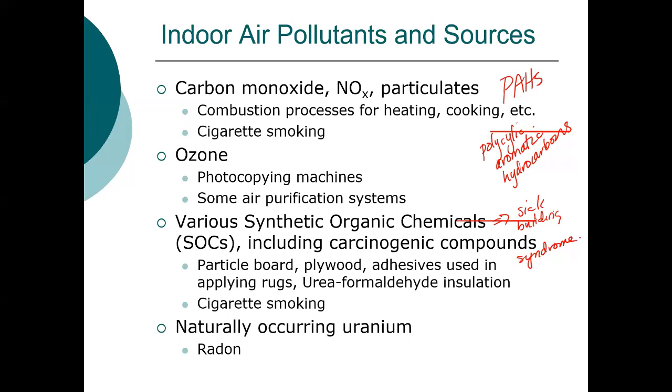When we model indoor air quality, we need to look at air movement into and out of the building. So we talk about infiltration. So infiltration is the natural air exchange that occurs between a building and the outside when all the doors and windows are closed. Cold day, you go for a walk, walking to class, you notice a home with a lot of icicles formed on the eaves.

Why are there icicles on the eaves? Notice other homes don't have icicles on the eaves. What causes those icicles on the eaves? Exactly, because the heat escapes easier, melts the snow, refreezes, and forms icicles. Tighter home, the heat isn't escaping, so you don't get the melting and then the icicle formation.

Air can move in and out of the house, through the eaves, through the sills, around your windows, around your doors. Really depends on how well those are sealed. The amount of infiltration is dependent on the difference in the pressure on the inside and the outside of a home, and also on the difference in the temperature.

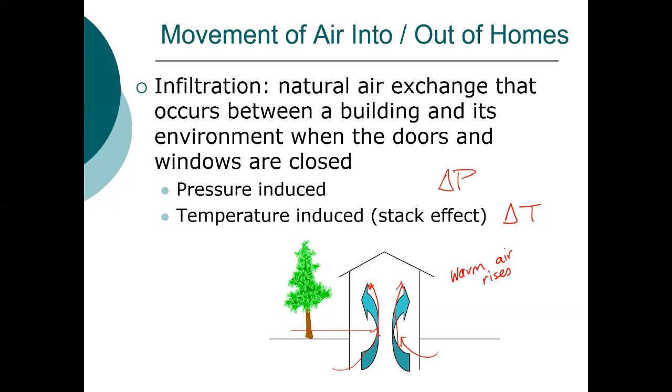We also talk about natural ventilation. Natural ventilation is that air exchange that occurs when the windows and the doors are open. You open the windows, you increase air circulation, and you're getting more air from the outside inside. Thanksgiving, a fair number of people did this where they wanted to gather, or for Christmas, they wanted to gather. They're worried about COVID.

So I know a number of people that actually had their dinners with their family in the garage, opened the windows, tried to open another window if they could in order to get cross ventilation. In order to do what? Why would they want to do this? Why would they choose to have dinner in the garage, open the garage door at least somewhat, open another door in order to get cross ventilation? What were they trying to do? To get fresh air. Right, to get fresh air, to lower, if anybody was sick with COVID, to reduce the concentration of virus particles in the air.

Forced ventilation is that ventilation that's due to mechanical air handling systems, so using fans and blowers. We can increase ventilation, so we increase ventilation. That decreases the concentration of the pollutants, but it increases our heating and cooling costs.

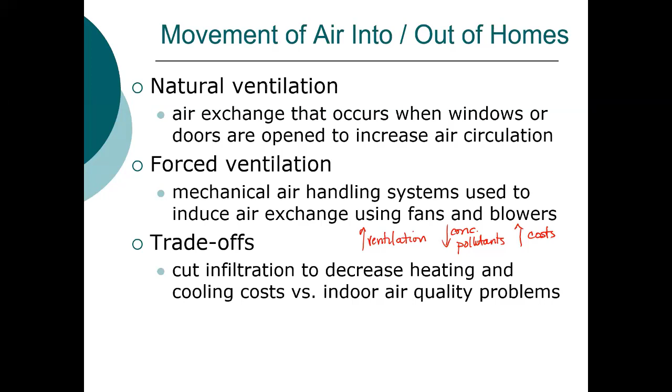Back in the mid-1970s, there was a major energy crisis. The cost of gasoline increased by about fourfold. Lines at gas stations were hours long. And as a result, a lot of homes that were built after that were built to be extremely tight, meaning that there wasn't much air exchange. Reduced heating and cooling costs, but the opposite was what? What happened in terms of concentrations of pollutants? So we make what we call a very tight home. We don't have much air exchange. It increases the concentration of the pollutants. So it's always a trade-off.

So as mentioned, infiltration rates depend on the wind speed, direction, the temperature differential, the pressure differential, and also where the leaks are located. Typically, air exchange rates in a home are about 0.5, and this unit here is air exchanges per hour. So a typical home is about 0.5 to 1 air exchanges per hour. So if we model the home as a box, it has a certain volume. If we have 1 air exchange per hour, then this volume of air is exchanged every hour. Very tight buildings, less than 0.5. A very leaky building can be as high as 10.

And also think of the same in terms of ventilation. So for instance, in a hospital setting, especially where you're dealing with infectious diseases like COVID, the recommendation is that the air exchange rates be in excess of 10 air exchanges per hour. You're trying to exchange that air to minimize the concentration of the airborne virus, in this case COVID, in order to minimize the potential for transmission.

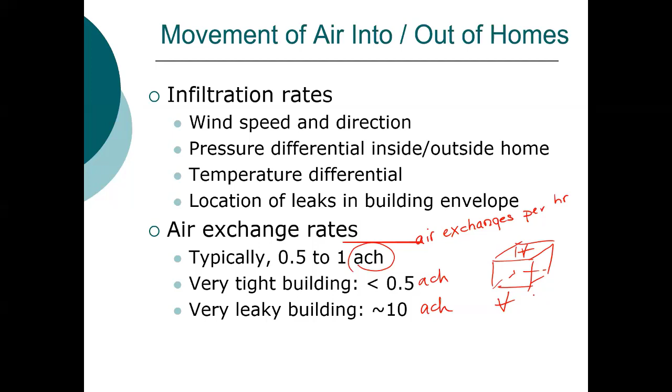Now, we will model indoor air quality using a very simple box model. So we will assume that this box is well mixed, that it is a CSTR, a continuously stirred tank reactor. Air will enter. We'll use C sub A to describe the ambient concentration from the outside entering the building. We have sources within the building. We'll look at decay, the decay rate constant, K. We may have sinks in the building.

We have decay rate. What are some potential sources of contamination or sources of pollutants inside this indoor environment? Named a few of them before, but let's think about what are some of the sources. Your own home, what are the sources of various different pollutants? Cooking. Okay. So especially if you have a gas oven. Breathing, CO2. Furnace, carbon monoxide, CO2, NOx. Anything else?

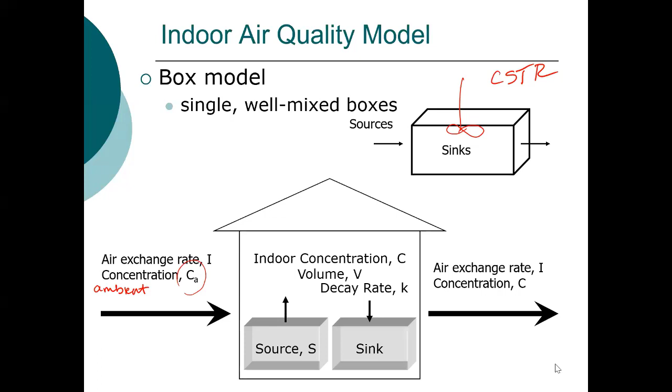It can be removed by ventilation systems, or by vacuuming. It settles to the floor, and then you sweep or vacuum it up. So it actually has sedimentation occurring. We can model that sedimentation typically as a first order rate expression, and we could vacuum it up. So those are some potential sinks for the pollutant. And then that pollutant can leave through the ventilation system. It can leave through the leaks in the house.

So we will describe the fate of these pollutants with a simple mass balance. We can describe the rate at which the concentration is increasing or decreasing within this space mathematically as the change in mass with respect to time. And that is equal to the mass rate of the pollutant entering. It can enter from the outside, so we have some flow in times the concentration coming into that space, plus whatever source terms are in the house,

minus the mass rate leaving that space, minus the mass rate of decay. And we will typically describe this with a first order reaction, K, so first order rate expression, C out times the volume in the system. Now, our mass is equal to the concentration times the volume. Our volume is constant because the volume of the house, or the building, isn't changing. We can take that out of the differential.

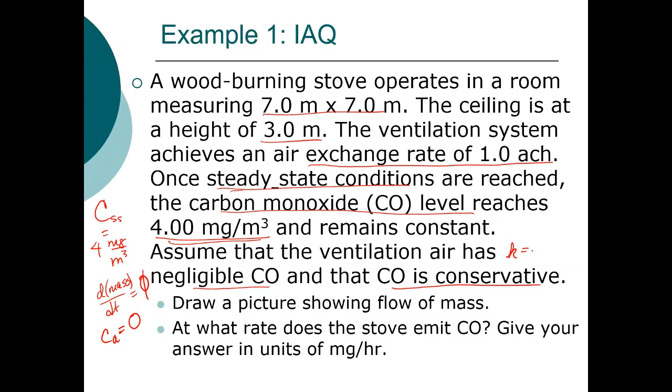So the rate constant is equal to 0. So the first thing we'll do is we'll just draw a picture of the system. So here is our room. We have a wood stove in the middle, burning wood. Our room has a volume of 7 times 7 times 3 meters. So the air exchange rate is equal to 1 air change per hour.

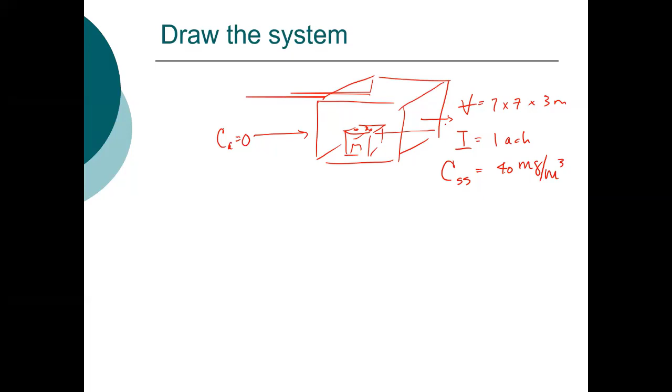The concentration at steady state is equal to 4 milligrams per meter cubed. We have air coming in, but C sub A is equal to 0. The concentration leaving is equal to what? C out. We'll assume that system is well mixed, so we can describe this as a CSTR.

If we have steady state, as we mentioned, that means that the change in mass with respect to time is equal to 0. We have a source term, S, which is what we're looking for. We have I, V, C sub A, which is equal to 0 because C sub A is equal to 0, minus I, V, C out, which is equal to the steady state concentration, minus K, C, V, and this last term is equal to 0.

So in this case, now, the source term is equal to I times V times my steady state concentration. So it's equal to 1 inverse hours times 7 meters times 7 meters times 3 meters times my steady state concentration, 4.0 milligrams per cubic meter. So volume cancels, and I'm left with milligrams per time. So that stove is releasing 588 milligrams of carbon monoxide every hour. We go back and we could look at that carbon monoxide concentration to determine whether or not it's of concern.